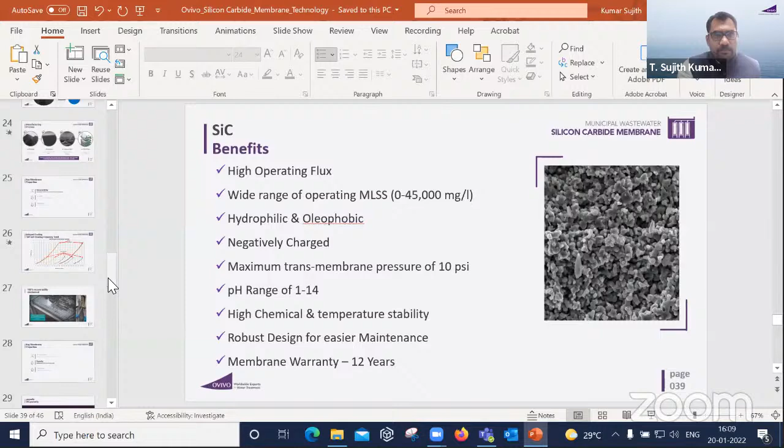I hope my screen is visible, Mr. Kailash, right? Yes, it is. Thank you. As I said, I'll be just taking you through for 15 to 20 minutes on Ovivo silicon carbide membrane technology, which has got limitless possibilities.

The flow of topics would be like: what are the wastewater challenges you have been facing currently, and what is the impact on environment, and what is the need of an MBR, and the MBR challenges. There have been various other membrane suppliers, like conventional membrane suppliers, and what are the challenges you have been facing, and how Ovivo contributes to those challenges, and what kind of value addition we bring to the table. That's how the whole topic will revolve today, right?

Now, what are the effluent challenges, right? When you talk about effluent challenges, you need to treat the water and reuse it.

That is one of the challenges. Consistent outlet quality has become a major challenge. In India, at least in municipal or industrial wastewater, plants are not running to design capacities. It's more on average 60-65% of the design water output parameter you get. You never get the design water quality or the hydraulic flow which is designed for.

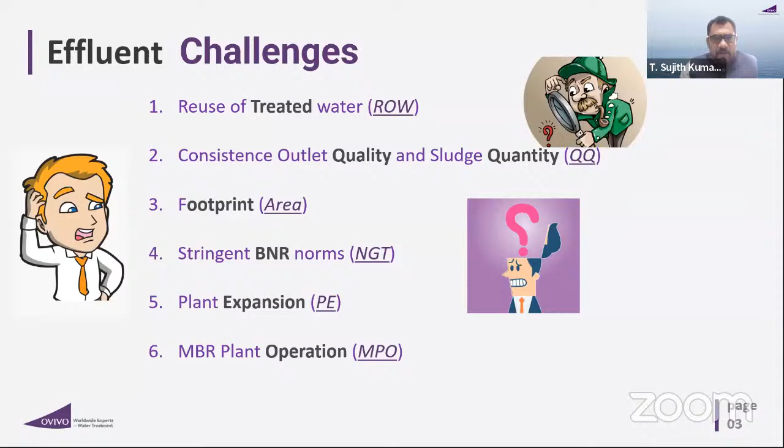Plant expansion has also been a challenge because of the growing population or growing demand. There has been an increase in challenges in augmentation of existing treatment facilities and plant operation, be it MBR plant or any other plant operation.

These are the first slide - what I talked about is the common challenges you face. I thought of preparing this next slide because we are more talking about industrial wastewater, so I thought of adding this.

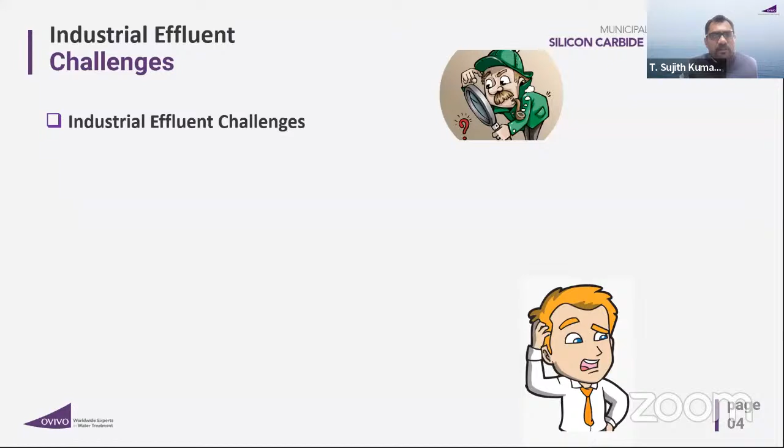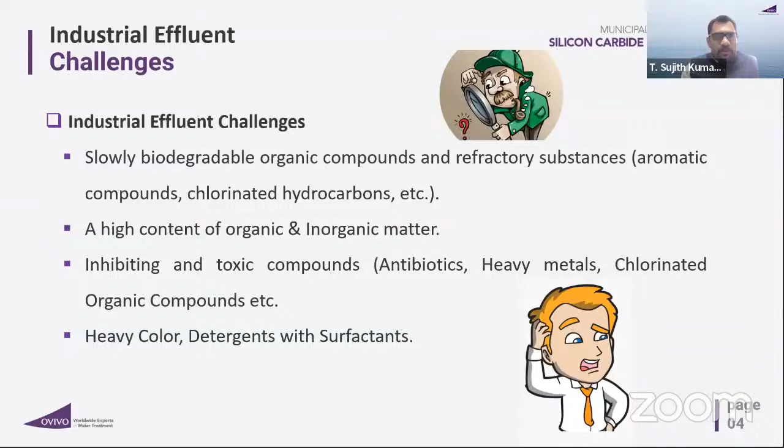On industrial effluent challenges, there's slowly biodegradable organic compound which has got a refractory substance - it is very difficult to degrade. That is one of the key challenges you face. The high content of organic and inorganic matter, inhibiting and toxic compounds - when you have these, definitely biology doesn't work. And heavy color, detergents with surfactants - these are the key challenges industrial effluent has, and of course the stringent regulations on discharge norms.

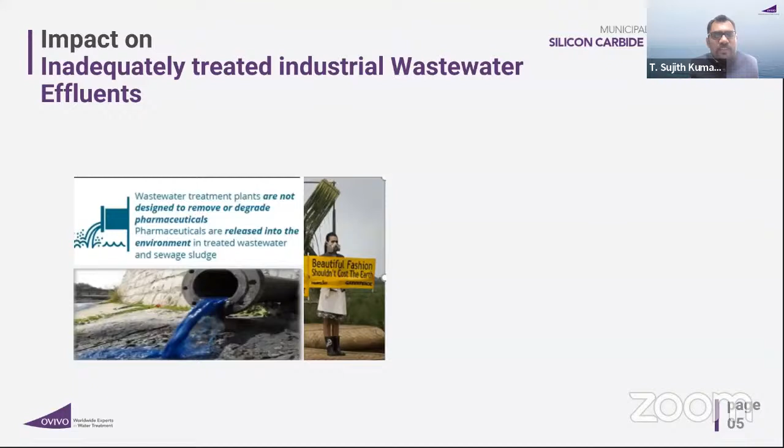Now what is the impact on the environment? If you don't treat the water properly, you are not doing your job - you need to have your social responsibility, treat the effluent to discharge norms so the receiving bodies are safe. If you don't treat it, dissolved oxygen depletion will happen to receiving bodies, you'll see physical change in their appearance. Eutrophication happens if nutrient removal is not done. Don't forget, this water is coming back to you - once you send it to receiving bodies, it comes back to you.

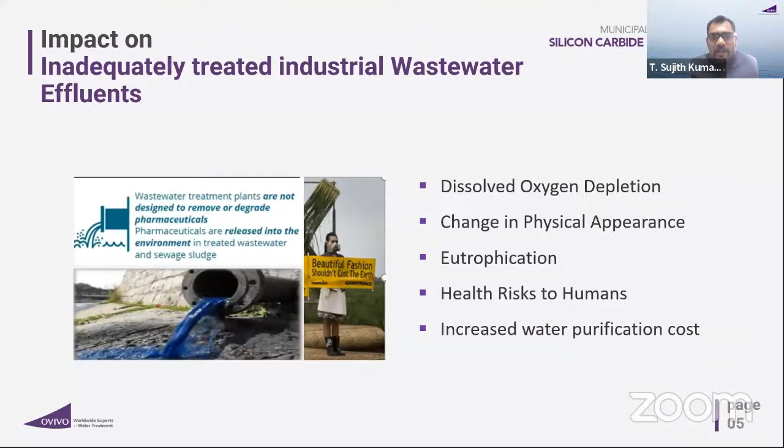So there is a health risk to humans and increased water purification cost. Also, you've been investing so much and if you don't operate the plant properly or select the right technology, you end up with increased water purification cost as well.

Now what is the need of the hour? You need to have sustainable wastewater management, choosing the right product and technology, which is key - recycle and reuse. This should be the mantra for all of India, at least for industrial clients. And optimize process design - you can't have a liberal design, you need to design your process optimized, as a workable solution.

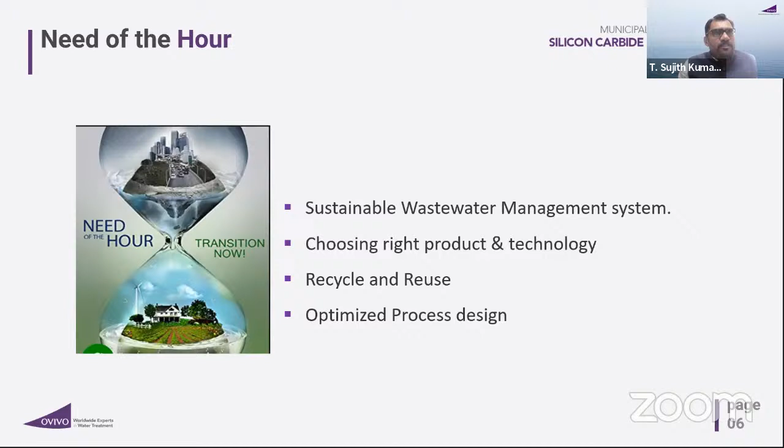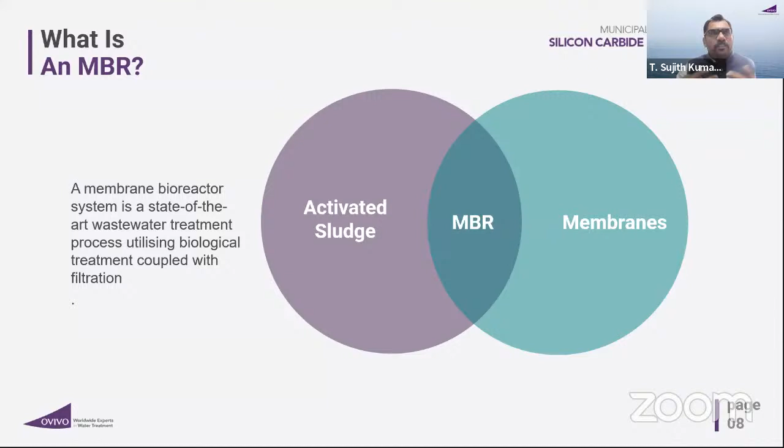Now we talked about the challenges and the need of the hour. Right now I'll get into an MBR system, which is today's topic - I'll talk about the MBR system and its challenges. What is an MBR? An MBR is a membrane bioreactor, it's part of the system, coupled with your activated sludge process and a filtration system. That is called MBR, membrane bioreactor - it is coupled with your activated sludge conventional treatment process itself.

Whatever BOD, biological oxygen demand, comes in, you give the oxygen, you cultivate the bacteria, and degrade it. In the same basin, you also do the nitrification process. Whatever ammonia comes in, you blow oxygen into the system, and all of it gets converted to nitrates. That water is going back to your anoxic basin.

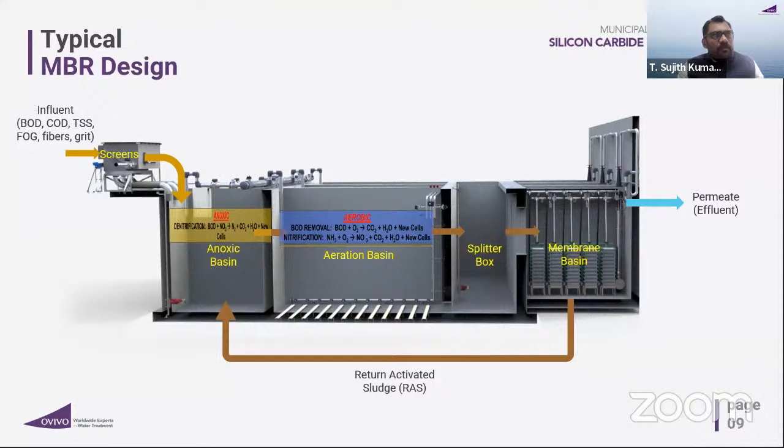When NH3 is converted to NO3, you need to convert that NO3 to N2. For that, you need an anoxic condition without the presence of oxygen. So you have this anoxic basin, typically 1.5 hours retention time, and you just convert that to nitrogen gas. It's a typical system. Any treatment plant, MBR, this will be the typical flow sheet you'd find.

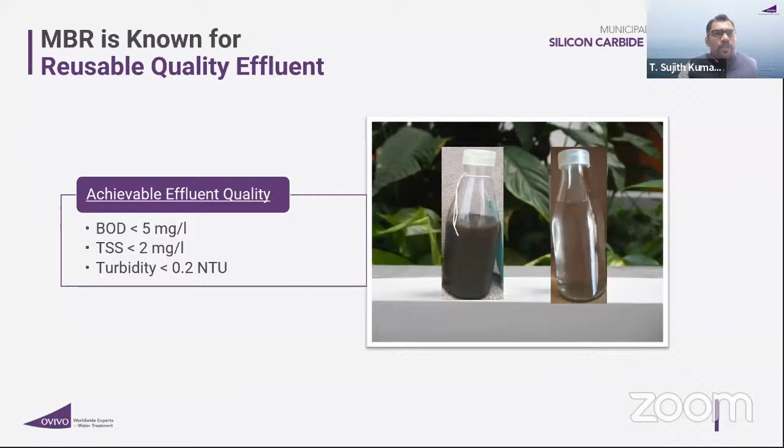Now, this is the basics which I talked about. People who have worked on MBR, if they think of MBR, they will feel that it will deliver the reusable quality - BOD5 less than 5, TSS less than 2, turbidity 0.2. Great, right? It is fantastic.

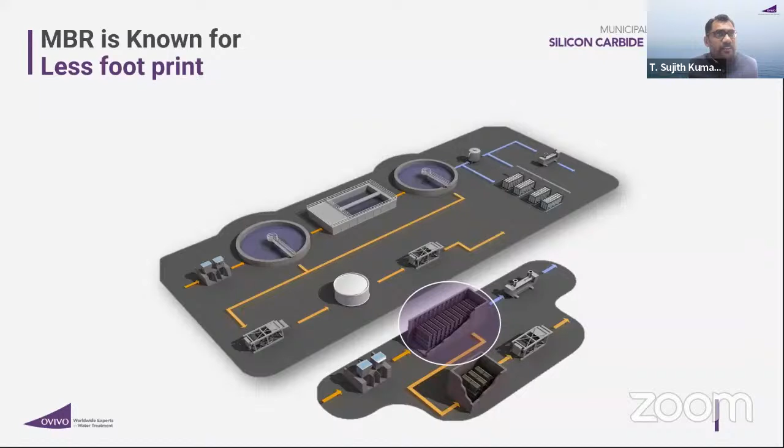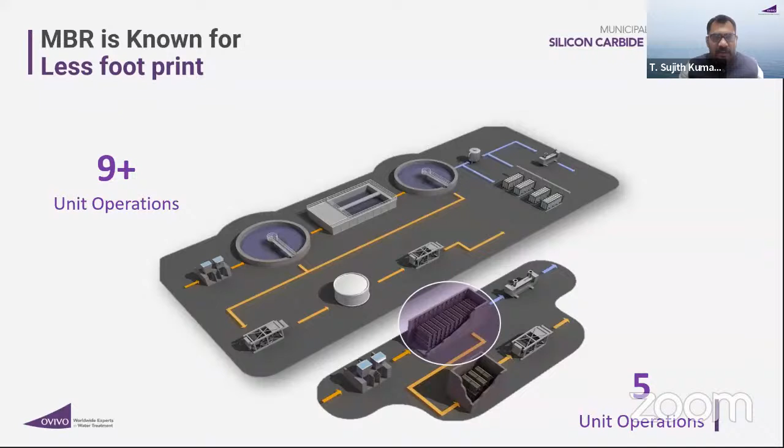And people also think MBR is known for less footprint. Definitely, if you compare with conventional treatment solutions, MBR will have very less footprint, almost I'd say 40% less, if you go with an MBR. That's what people always assume, and they also think about capacity augmentation, small footprint, retrofitting ASP to MBR, or for the recycle. So this is what comes to people's mind when they think of MBR - these are the things which would happen.

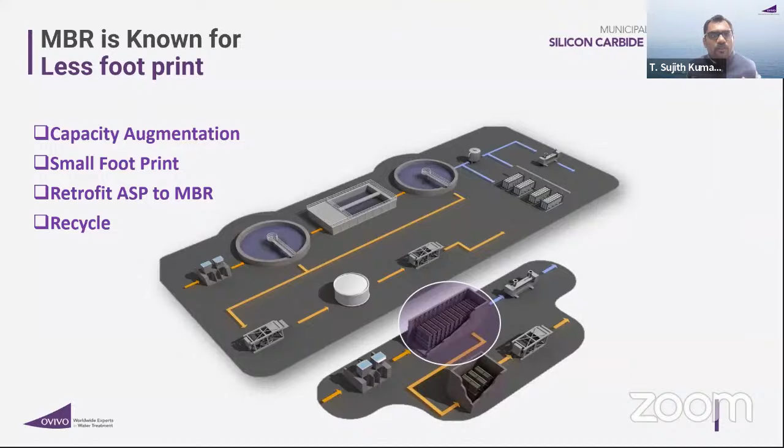But it could be challenging. Membranes could be challenging. Now what are those challenges? I'll address the challenges and how Ovivo adds value. I'll talk to that later.

Now, these are the people who have used conventional membranes, MBR, membrane bioreactors. They knew they can easily connect to these wordings - they will see there's a TMP limitation. Quickly, their TMP gets increased, transmembrane pressure gets increased. Premature fouling happens. People say that you need to do the cleaning once in, let's say, 3 months, but you end up cleaning once in 15 days or a month.

Durability and robustness - people say this has got a durable life of 7 years, but the actual practical scenarios could be something else. Premature replacement - usually the warranty for conventional MBR, people say it's 5 years, but they end up replacing very quickly. Premature replacement happens. Permeability is an issue, recoverability is an issue.

When I talk about permeability, if you design a system of, let's say, 1 MLD MBR system, within 3 months of operation, you will see there is a flux decline in polymeric membranes, which is proven. And Ovivo has been doing this business for more than 2 decades. I'll catch up on that later, what we do.

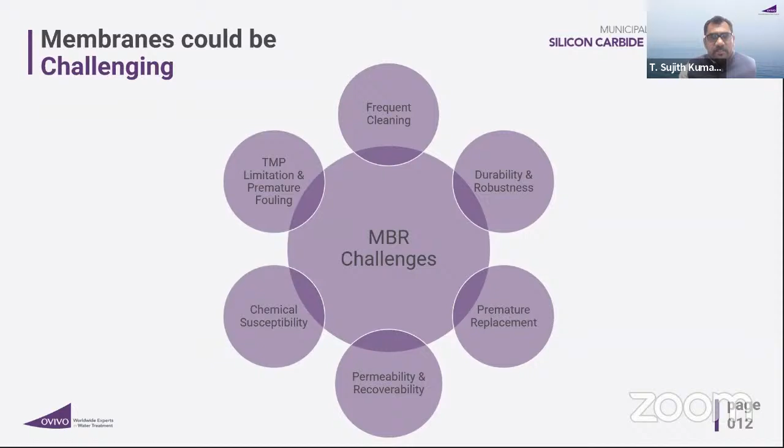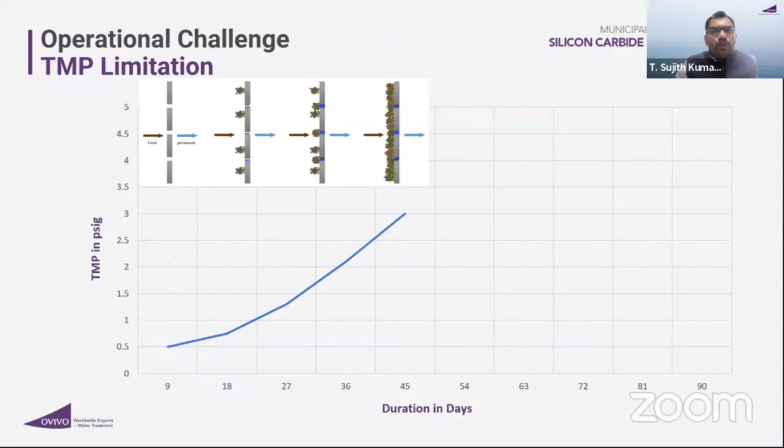Now, how it affects, I'll just brief on those. What are the operational challenges? Definitely, TMP is one of the operating limits. If you see the top slide, on the vertical side it's shown as membranes. When the membrane is clean, you get a clean flow. Eventually, when it reaches 45 days, you have to do the cleaning. When you keep doing this repeatedly and it reaches 3 psi, your membrane would get damaged.

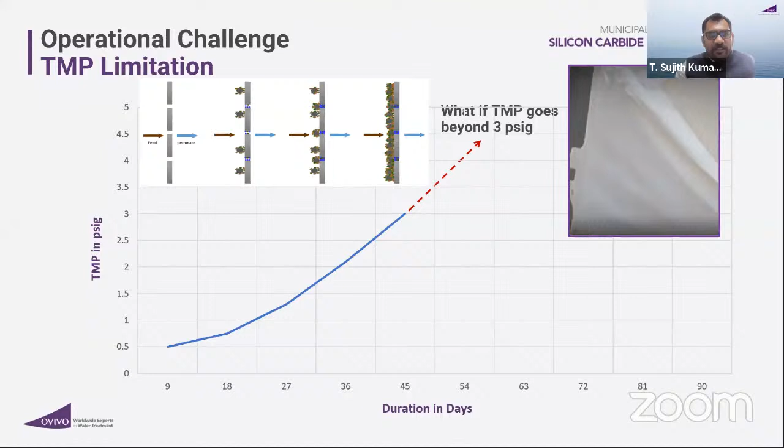When you intend to do the cleaning every 45 days and the frequency is very fast, the membranes tend to get damaged. Now, material dictates the TMP limits, because these are polymeric membranes - it cannot handle more pressure, and it is not resistant to chemicals. You will see that this would get damaged very soon.

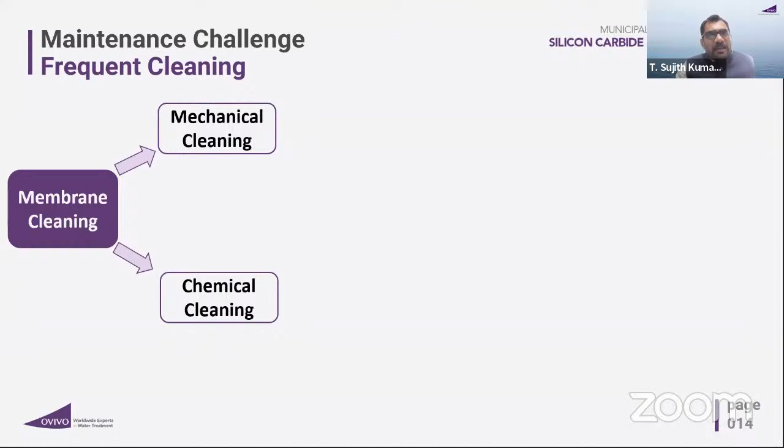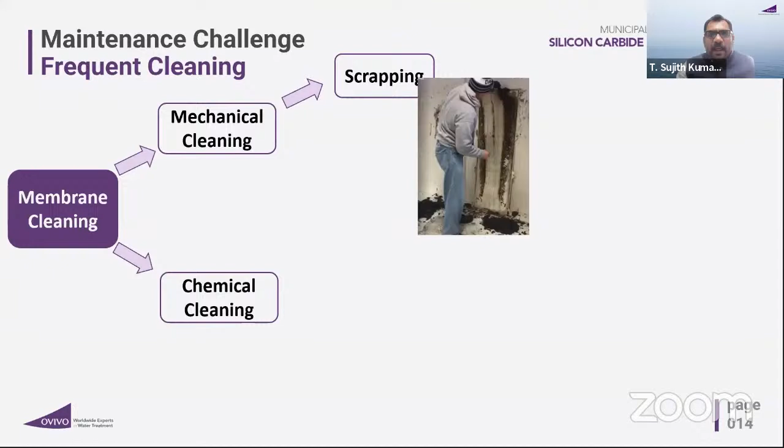Maintenance challenge, yes, you have this frequent cleaning issue. There are 2 types of cleaning: mechanical cleaning or chemical cleaning. In mechanical cleaning, you take out those membranes which have been sludge dewatered or highly fouled, and you scrap it out, which is very difficult. Or the other option is pressure wash, which is not possible for polymeric membrane because there is a pressure limit. You cannot go more than 3 psi, so there is a limit.

Or the other option is you go with acid cleaning and bleach cleaning. Again, you have a limitation of 3 to 11 pH and 5 lakh ppm of chlorine contact time. Frequent cleaning of any polymeric membrane will lead to membrane damage.

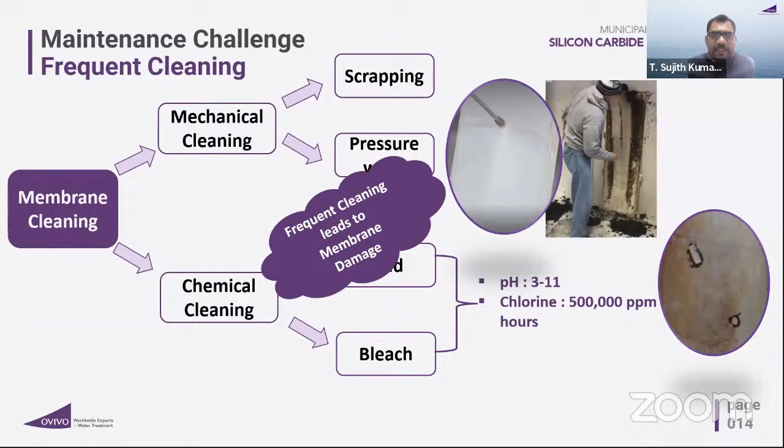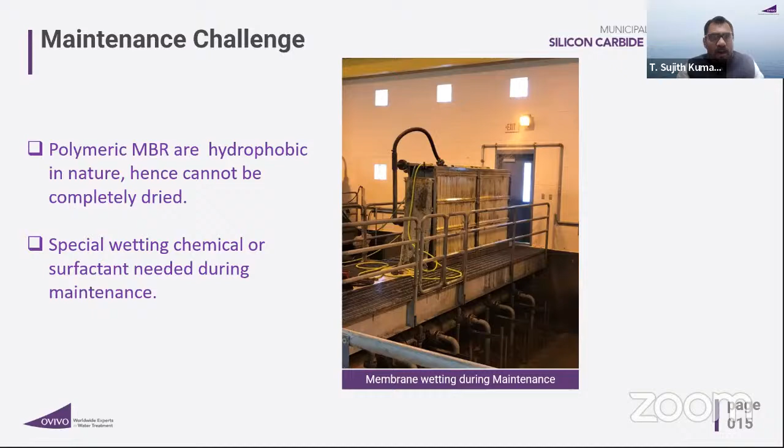The other maintenance challenge: in polymeric membranes, if you have to take out those membranes for some reason and do internal maintenance in the tank, you need to make sure these polymeric membranes are continuously kept in a wet condition, because these membranes are hydrophobic. If you don't keep these membranes wet, the pores would collapse, and eventually you will not get the required desired output parameters. The other option is you keep wetting with water or add some chemical, but again it adds to the cost.

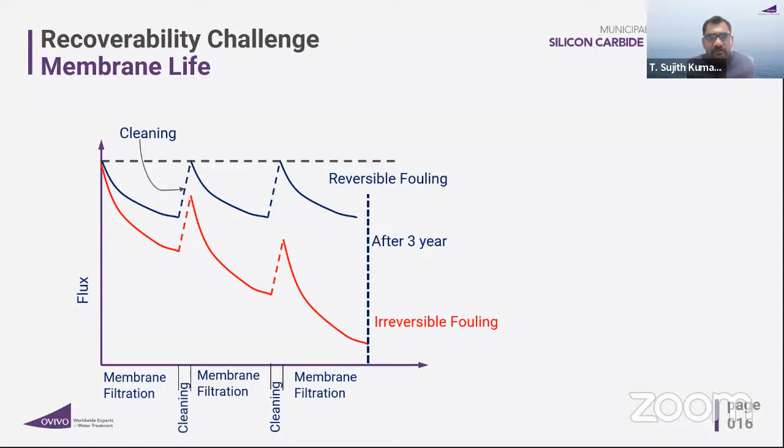The other recoverability challenge is the membrane life. When the membrane is new, any membrane is bound to foul and bound to scale. You operate the system, the membrane gets fouled, you clean it, it comes back to the original condition, and you keep using it. But after some time, there is irreversible fouling happening. Once the membrane is cleaned, you'll see a flux decline, not getting back to the original position. Slowly, eventually after 3 or 4 years, those membranes become irreversible, meaning you can't clean and recover them. That is the point you decide to replace the membranes.

Now, what are the reasons for flux decline? Sludge dewatering is one of the reasons, along with organic fouling and inorganic scaling. This anyway has to happen because you are dealing with wastewater, so it is bound to happen.

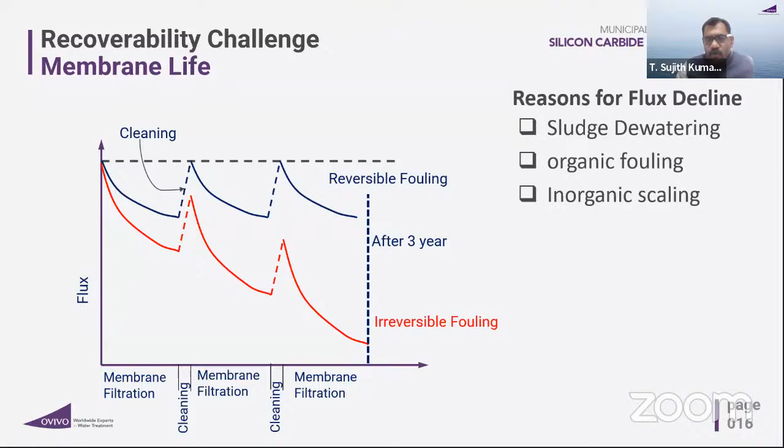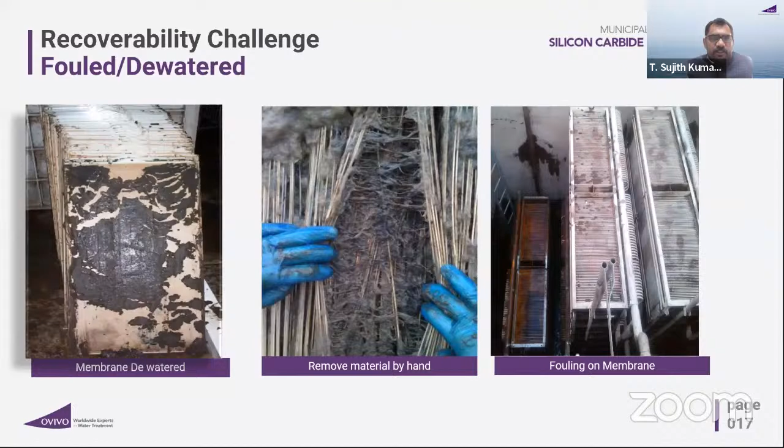These are some pictures of fouled and dewatered membranes. We've found there are flat plate, flat sheet membranes available in the market. On the left side, you can see the flat sheet membranes which got dewatered, and the middle picture shows the hollow fiber membranes. It's very tricky once hollow fiber membranes get dewatered, even very tricky to do physical cleaning, because it would look like a bunch of straw - you cannot pull the sludge from in between the bunch of straw. And the other fouling you can see is iron fouling, which usually happens on the membranes.

No membrane is immune to fouling, no membrane is immune to scaling. The key lies with the material and how easily and quickly the clogging can be removed - meaning recovery, it has to be recovered back. Membranes are bound to foul, bound to scale. The challenge lies in how fast you can recover those membranes and bring them back to the original position.

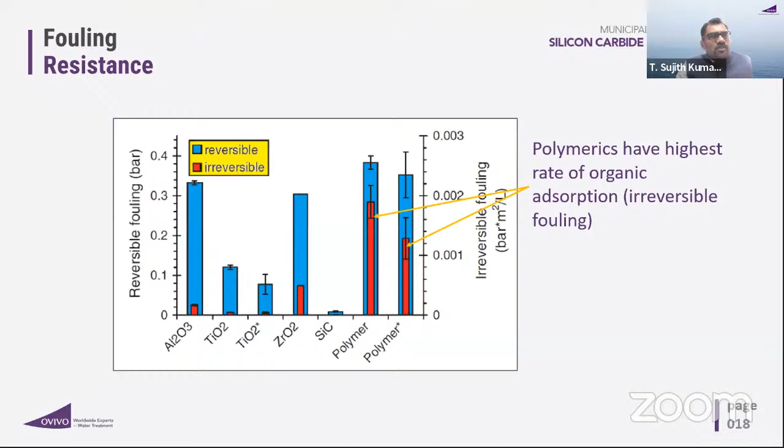On the fouling resistance, this data is publicly available. If you see, polymeric membranes have got the highest rate of organic adsorption, meaning irreversible fouling. Among the many types of membranes available, polymeric membrane has got the highest organic adsorption rate.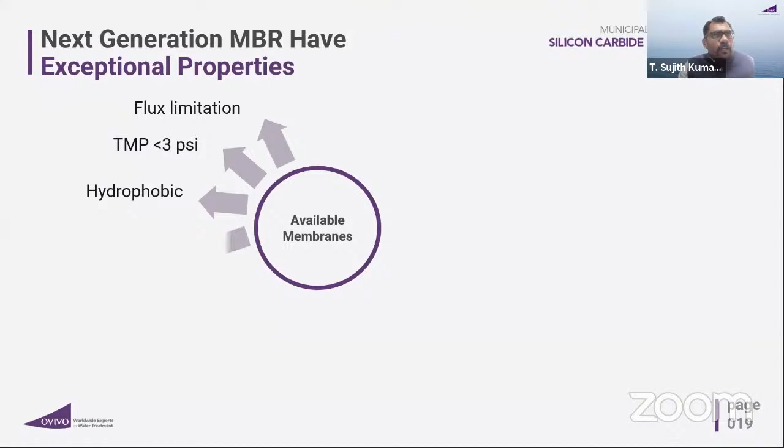Now, there are new generation membranes available with exceptional properties. Let's see what they are. What we learned is conventional polymeric membranes have a flux limitation and a transmembrane pressure limitation - you can't go below 3 psi. Membranes are hydrophobic, so there are potential chances of membrane pores collapsing during maintenance activities. Fouling propensity is very high, frequent cleaning happens once in 45 days, and it's sensitive to chemicals because you can't go beyond 3 to 11 pH. The warranty you get is 2 to 5 years.

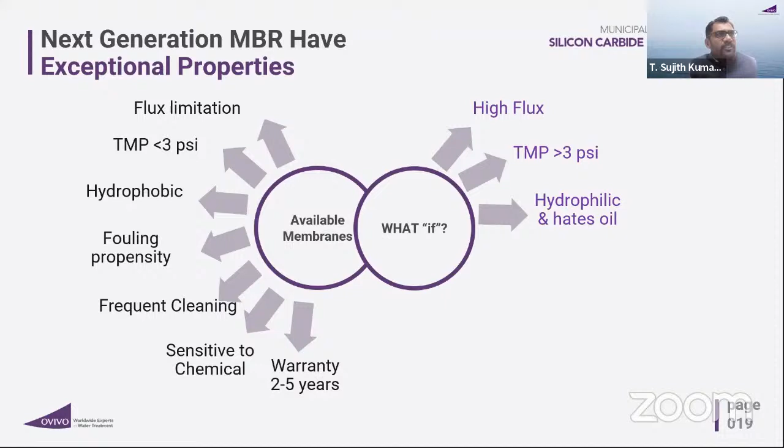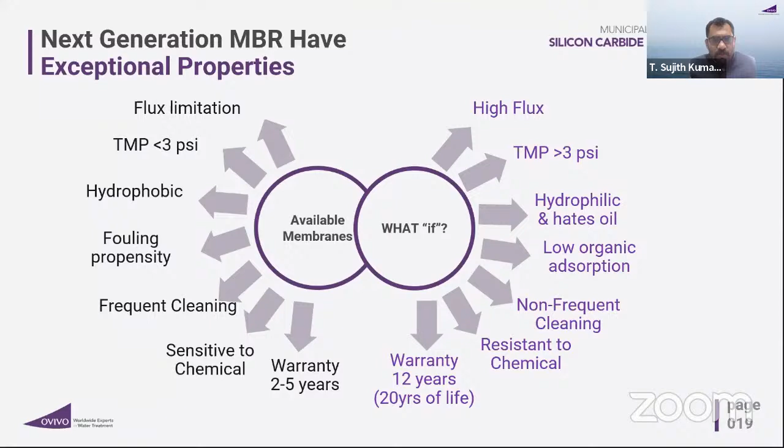Now, what if there is a membrane available which can take very high flux, 3 times that of polymeric, TMP up to 10 psi, a membrane which is naturally hydrophilic and oleophobic, with the lowest organic adsorption rate, non-frequent cleaning, resistant to chemicals. Beyond all this, the life of the membrane is 20 years, and the supplier gives you a warranty for 12 years. Don't you prefer that?

I'll just brief you on our experience. We have been in this field for more than two decades now. We are totally submerged into the MBR system. We used to promote, Ovivo used to promote polymeric membranes earlier. Slowly we moved out of polymeric because we found the future is something else, which I'll share.

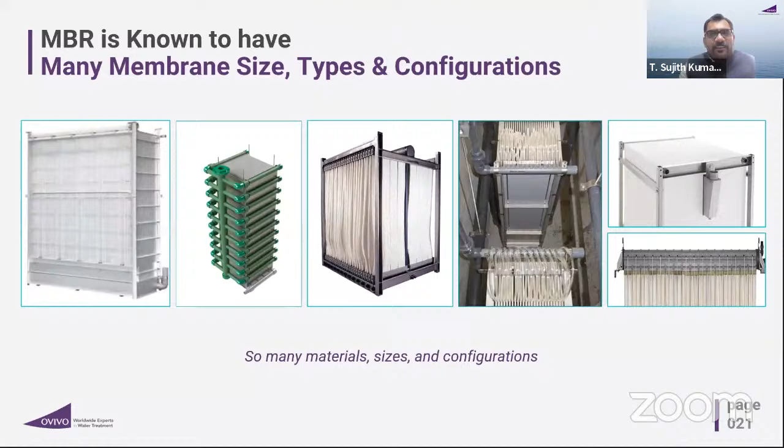Usually customers get confused, because in the market you'll find many types of membranes available. You have flat sheet, polymeric, PVD. In polymeric itself you'll have PVDF, you'll have PES, you'll have PE membranes, many types of membrane. So customers usually get confused which one to choose.

So I'll just run this video for a minute. I'm sure that you can hear the sound also.

I'm sure you are able to watch this video seamlessly without any technical glitch. We have a new generation membrane which has got limitless possibilities. It will overcome the issues faced with polymeric. Let's see.

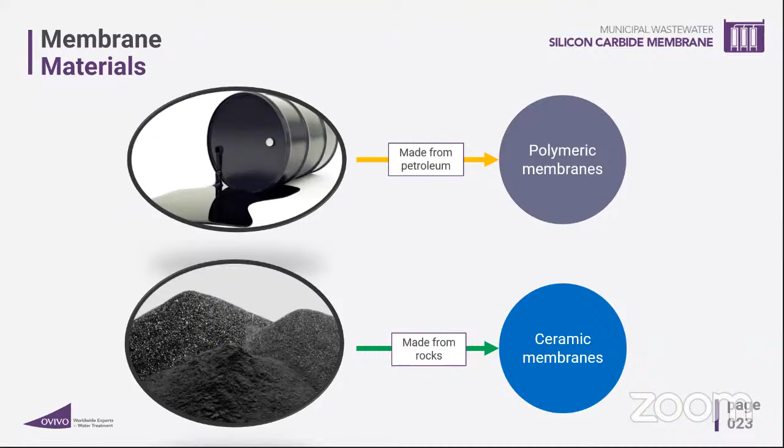Hello. Yeah, Sujith, your voice is frozen. Sujith, I believe we are facing some technical difficulty at your end. Can you hear us? Can somebody from the Smart Water team do a quick call to Sujith to check? Hello, yeah Sujith, we missed you when you... Yeah, I'm sorry for that. Yes, I'm sorry for that.

Well, whatever precaution you take, you'll end up with some technical glitch. I'm sorry for that, maybe I missed this slide. You were in the slide immediately after the video about the materials for membranes. Yes, Sujith sir, you will have to reshare the slide once again. Okay, I'll do that. Sujith, you still have 2-3 minutes. Yes, I'll wrap it up.

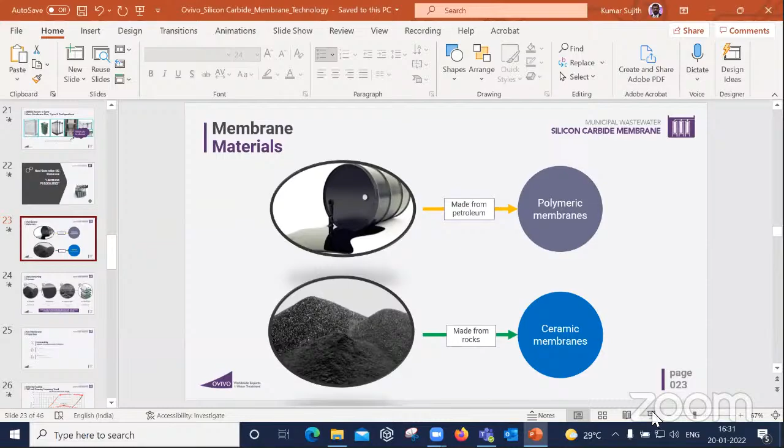We can see the slide. You can just play it and make it full screen. Good to go, right? Okay, sorry, I'll talk about membrane materials.

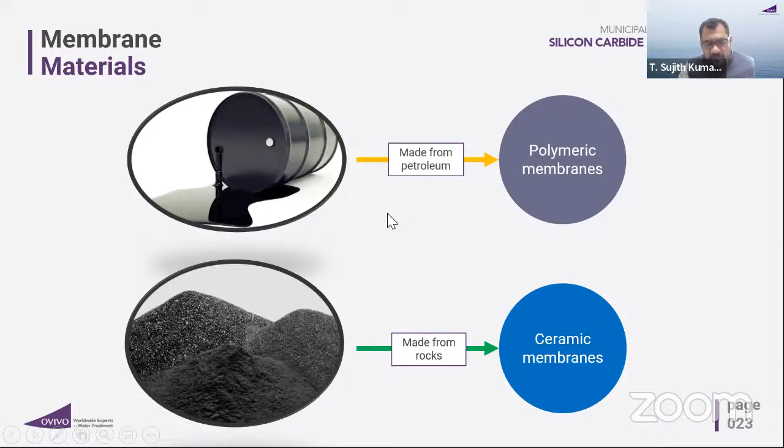Polymeric membranes are made out of petroleum product, which is not environmentally friendly, whereas the advanced new generation membrane we offer is made out of rocks. It's a simple inert material. If at all something goes wrong after 20 years, you have to dispose of this membrane. It's very easy to dispose because you can just crush these membranes and bury them. It's as simple as that. Since these are all made out of inert material, it's just a manufacturing process.

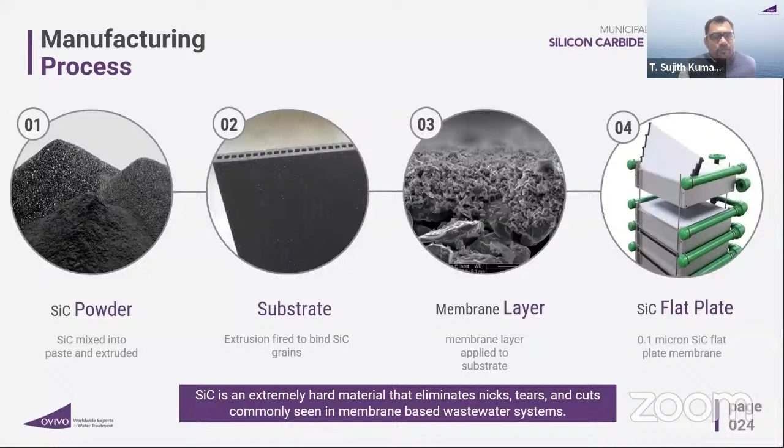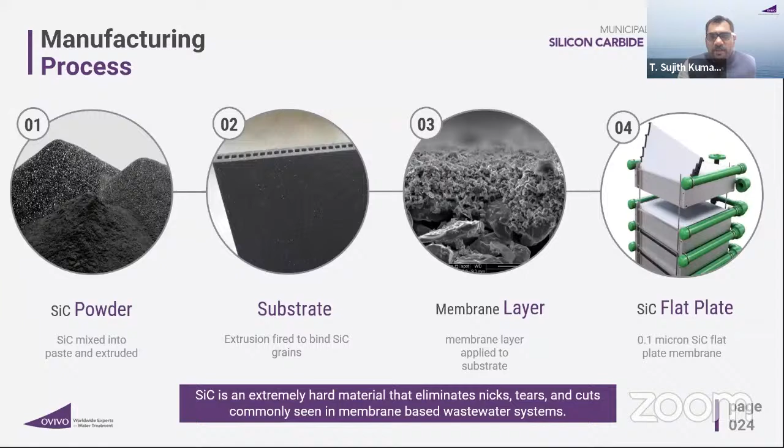We have this SiC silicon carbide powder, which would be extruded to the paste, and we expose it to the sintering process at 2200 degrees of temperature. We apply it on the membrane layer, and the membrane module is formed. It's silicon carbide, Ovivo silicon carbide membrane modules.

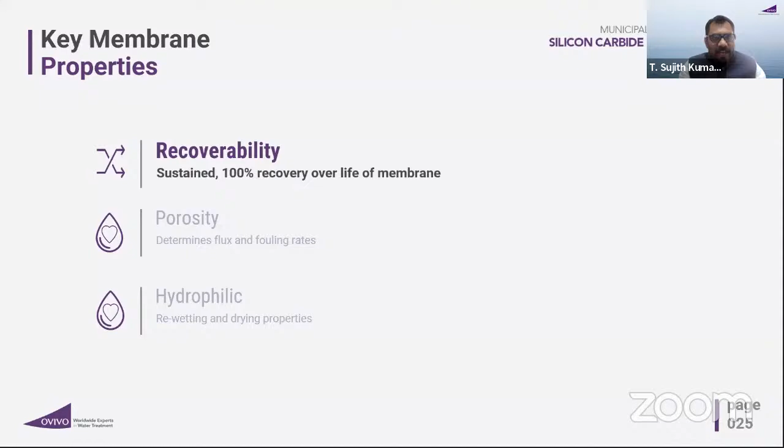The key advantage, key property of this membrane which polymeric cannot compensate for, is the 100% recoverability. As I said, the membranes are bound to foul, bound to scale, but the recoverability is the challenge. You can recover these membranes.

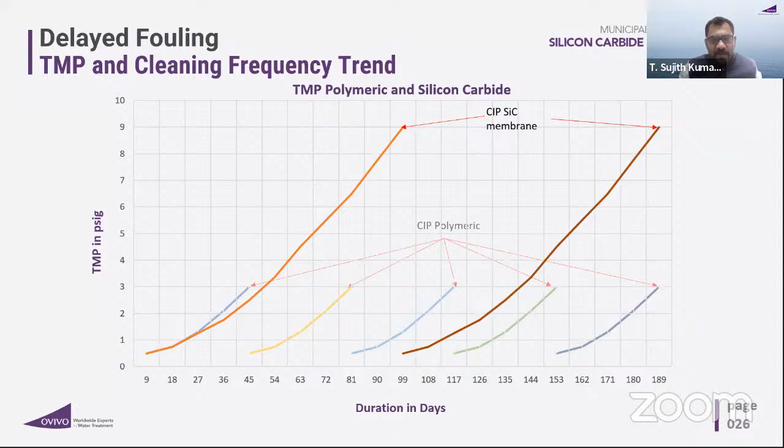I'll just brief quickly, I know I'm running short of time. As I demonstrated, polymeric membrane needs cleaning every 45 days. If you go with any silicon carbide membrane, the cleaning would take around 90 days, that is 3 months. That means you are delaying the cleaning. When you delay the cleaning, you are saving on chemical, you are saving on flux, everything.

But since these membranes are very robust, made out of inert material, you can also do a pressure wash. You take out those membranes, if it is dewatered completely, just do the pressure wash with 2 to 3 kg pressure, absolutely no issue, whereas that is not possible with polymeric membranes. And the porosity - SiC silicon carbide membrane has got the highest porosity among available membranes, compared to PES or CPE membranes. That is the reason we are able to push through more flux, 3 times the flux compared to polymeric.

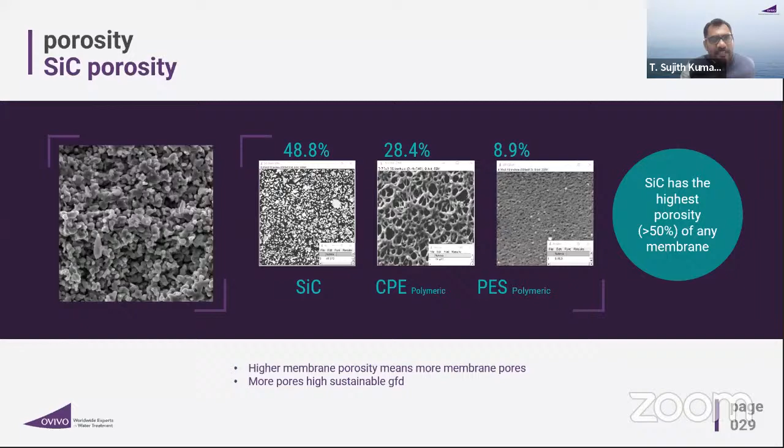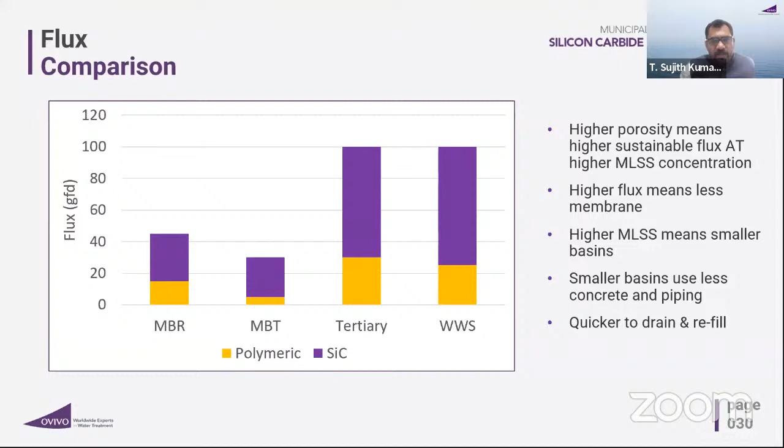When you are able to take more flow within the given area, your footprint also would come down. This is some of the comparison on the flux. We apply this membrane to many applications, be it clear water treatment, membrane bioreactor, thickening application - MBT is membrane biothickening, tertiary wastewater or wet weather system. You can take very high flux compared to any polymeric membranes.

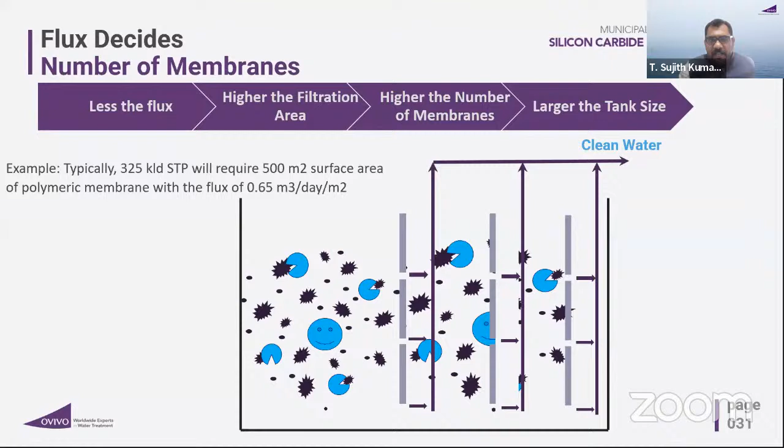It's a typical example what we have shown for a 325 KLD STP. You need a polymeric membrane area of 500 meters square with the flux of 0.65 meter cube per day per meter square. This is the typical polymeric design. Whereas if you go with SiC membranes, you need just 30%, 40% of it, 171 meter square area, that's it. Your footprint also would be very less because we take the flux 3 times. In polymeric, you can take only 0.65 meter cube per day per meter square. Here we can go up to 1.9 meter cube per day per meter square.

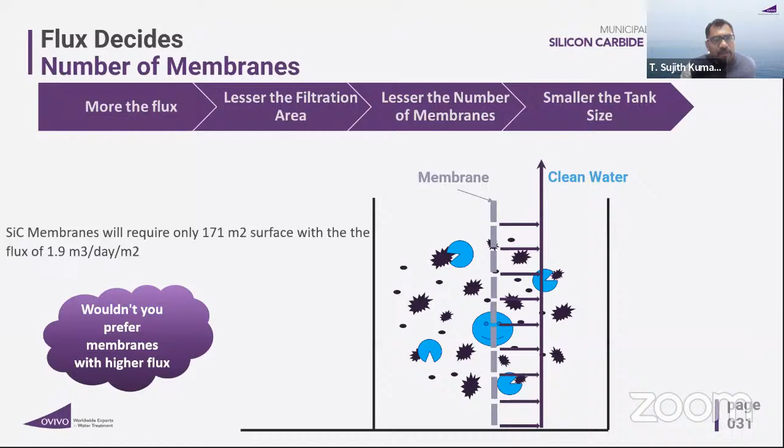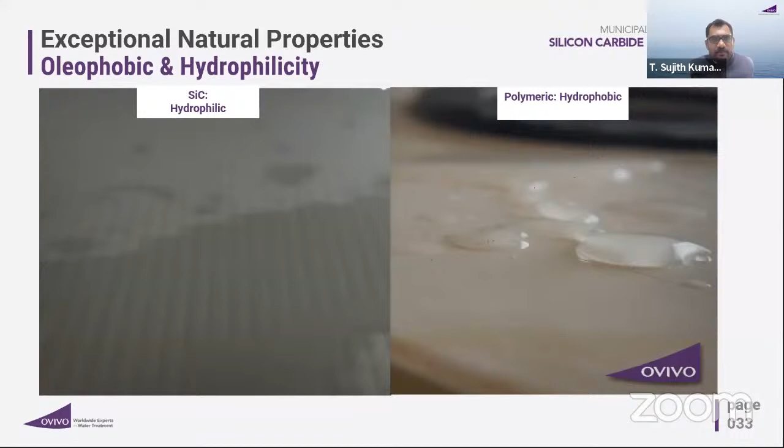And as I said, it's also oleophobic. It has also got negatively charged - these membranes are also negatively charged. Particles around the membrane, be it in submerged condition, you'll see the particles are negatively charged. The fouling propensity will be very less because the particle around the membrane is also negatively charged, and membrane is also negatively charged. It tends to repel.

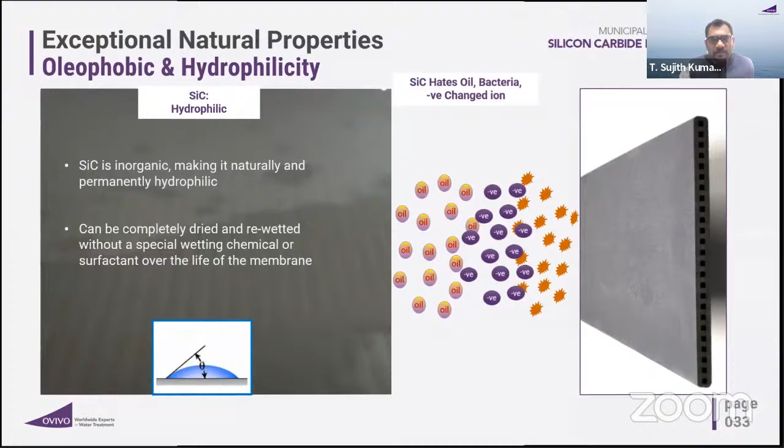And it has got an exceptional resistance to temperature and chemical. Temperature, it can handle up to 80 degree temperature. It can handle up to pH 1 to 14. And the chlorine ppm mass is 50 lakhs - we are talking 10 times more than the polymeric. Whereas in polymeric, you can't go beyond 5 lakhs. Here we are talking about 50 lakh ppm mass.

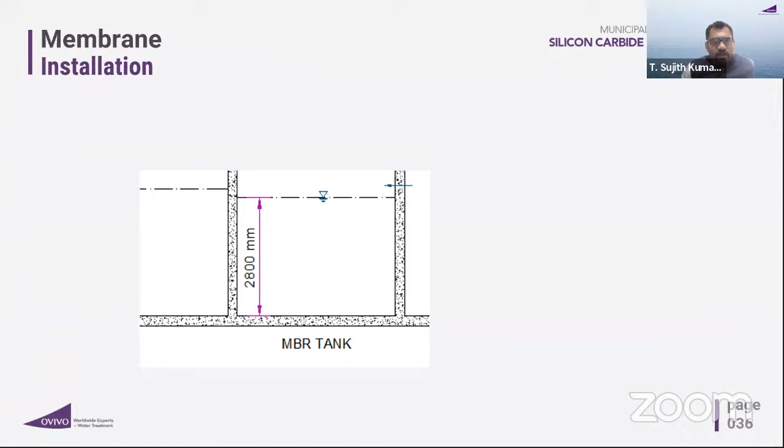Yeah, this we talked about it. And it's easy to install also. It comes with 160 module, one module will have 6 meter square area. You can just put one by one easily.

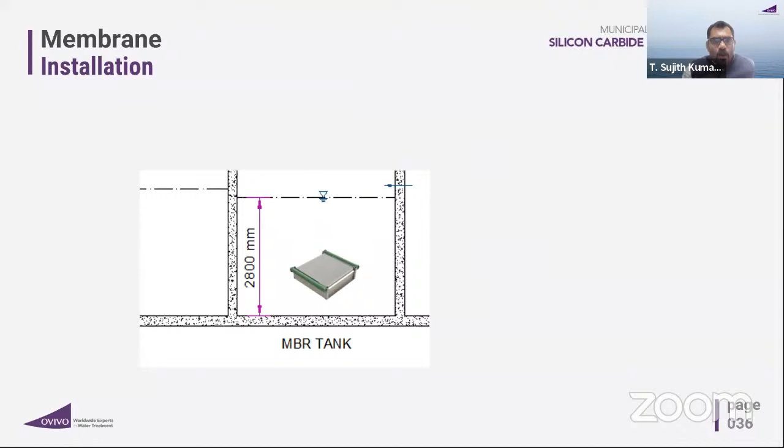This will be tricky where if you want to install the membrane system in the basement, where you have the clear height will be very less, in that area you can have this kind of arrangement.

And definitely it gives you the superior treatment - BOD less than 2, TSS less than 2, ammonium nitrogen 1, the discharge limit, even the SDI less than 3. You can straight away pass this water to the RO system, no need of any further treatment.

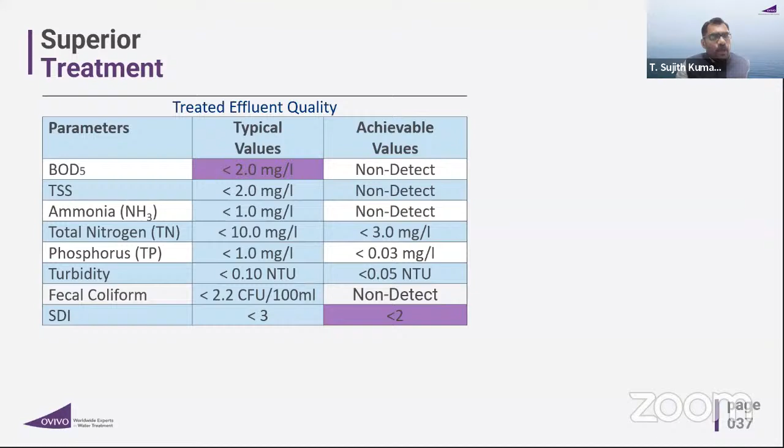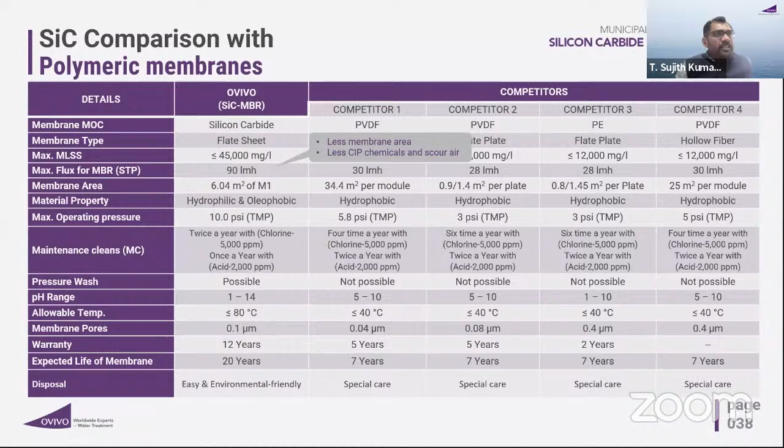It can handle up to 45,000 mg/L because it has been used for various applications, including membrane thickening. 90 LMH is the flux, whereas compared to 30 LMH what polymeric membranes use. This membrane is hydrophilic membrane and oleophobic membrane. Thus, it has got a low propensity of fouling of the membrane, and it also repels the oil because it is oleophobic.

This is a brief comparison what we made it for the polymeric membranes, be it PVDF or PE membranes. And we also offer 12 years of warranty with 20 years of life.

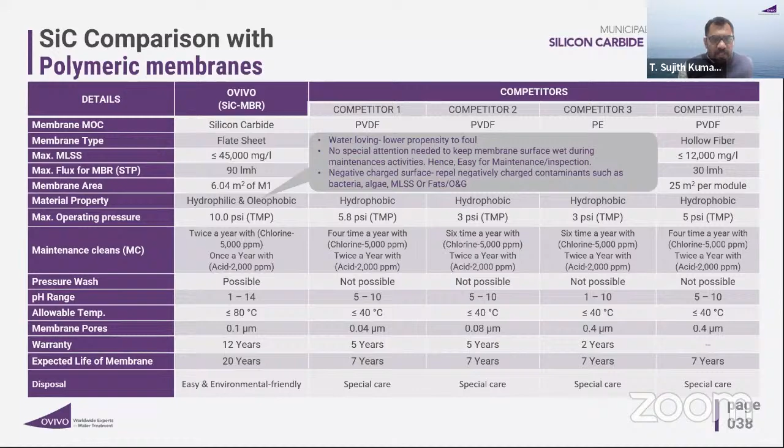I'll just quickly shift. Yeah, it's the same thing. These are our esteemed customers where we have executed our MBR systems.

I'll just brief about Ovivo. I haven't talked about Ovivo, what Ovivo is. It's a Canadian company, deals with water and wastewater treatment. We have an expertise of 150 plus years. We have grown by acquiring many companies.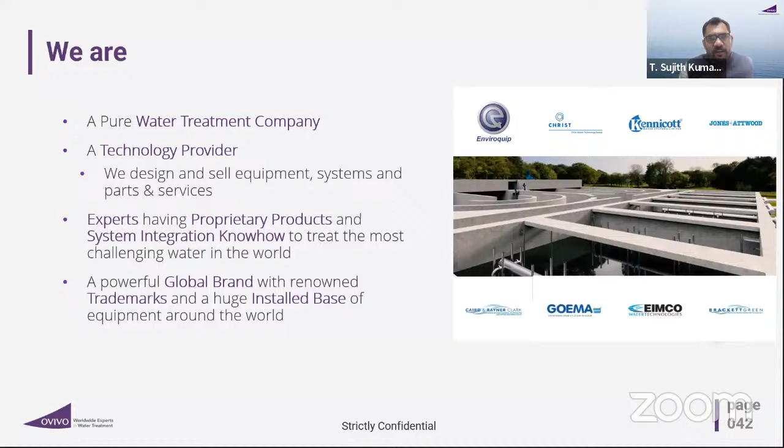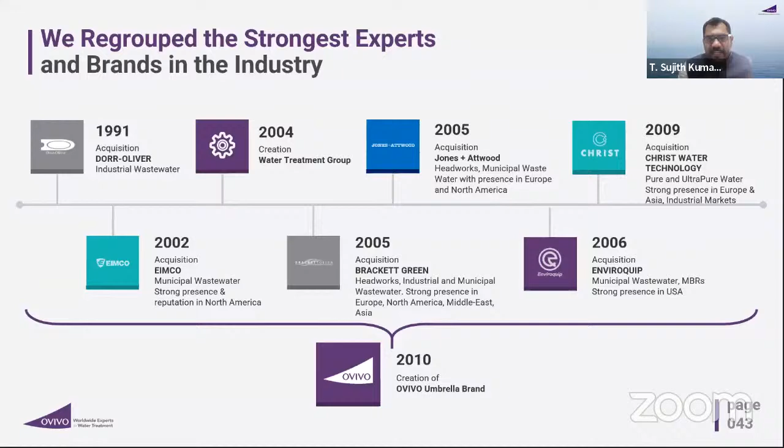This is just a history of how Ovivo was formed. I'll just skip this. It started from 1991, acquiring a company called Dorr-Oliver in the US, and thereafter they didn't look back.

We have built an integral platform in India. India is considered the knowledge and service center, and we are also a center of excellence for biological process, sitting in the India office. We have been supporting our global offices, be it the North American market or European market. We have 55 plus engineers in India who support domestic as well as global projects.

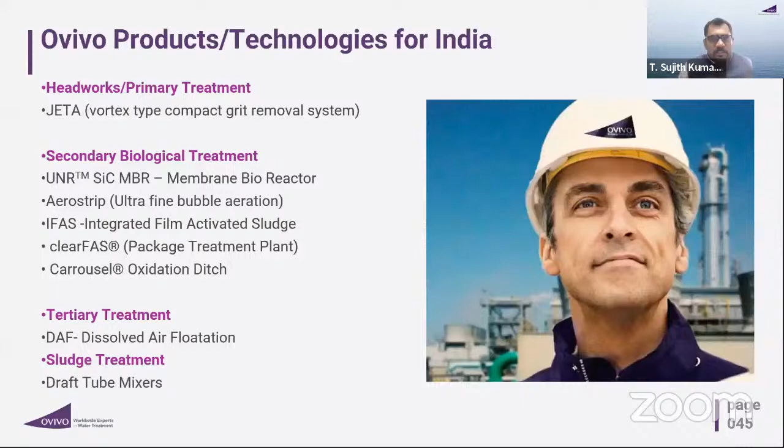These are our products which we have been selling in the Indian market. I'll be happy to connect online or offline to discuss more on these products and technology. Essentially, we are very active in the municipal and industrial market.

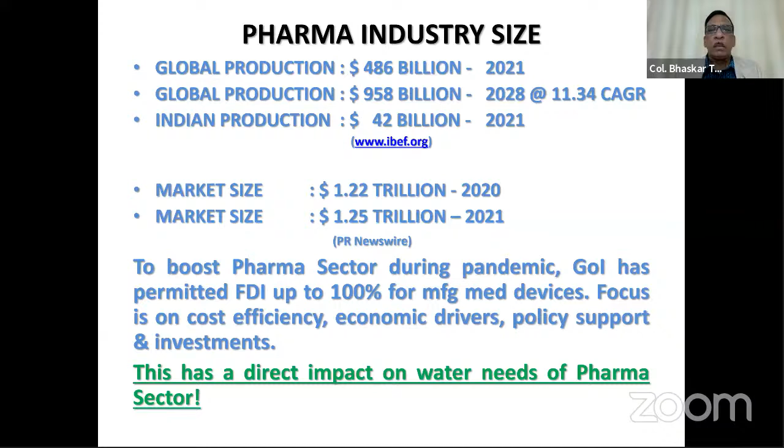Now, all this is going to have a direct impact on the water required by the pharmaceutical sector. There are several guidelines and directives on the water quality required by the pharmaceutical sector. Water for pharmaceuticals use, WPU, is a term which is very commonly used across the industry.

A working document in May 2020 was issued by the World Health Organization. It was titled Good Manufacturing Practices, GMP, Water for Pharmaceutical Use. It basically focused on the production of pharma grade water for injection, also called WFI, by means other than distillation. Earlier, distillation was considered the only process to produce water fit for injection purposes. Now, with the advent of several other physico-chemical processes, we have multiple options to reach the same level of purity.

The important thing about pharmaceutical water is the microbiological and chemical quality of water, which has to be controlled through the several stages of production, storage, and distribution. There are two major pharmacopoeial requirements which provide guidance for production of WFI.

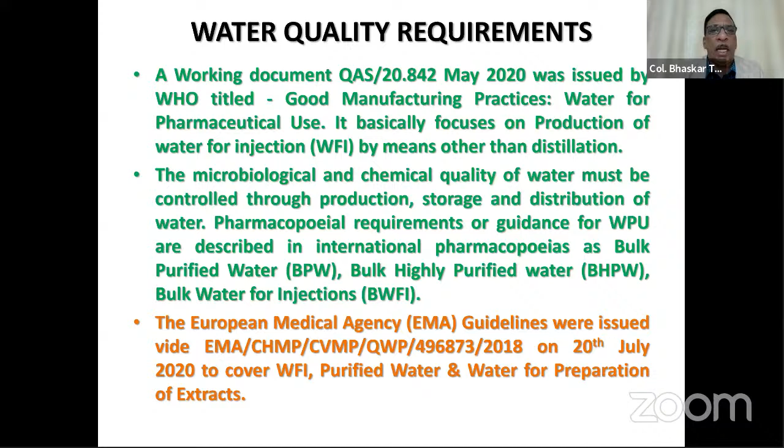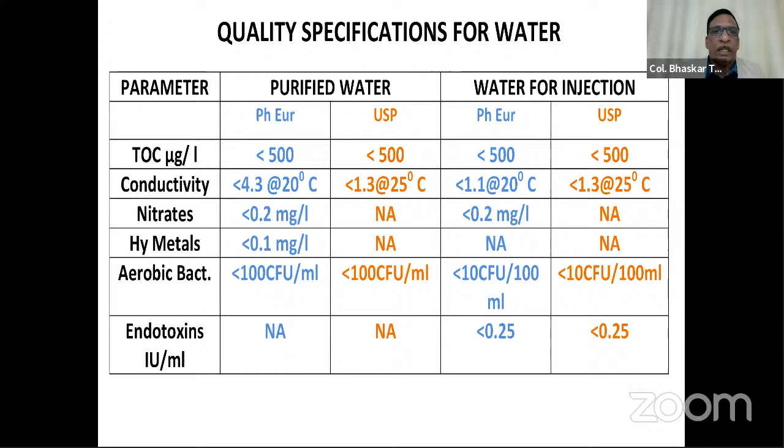Now, first, I will talk about the water requirement of the semiconductors industry or the semiconductors sector. Here again, if we go by the global business in semiconductors, it rose from $426 billion to $452 billion in the last year, and is expected to grow to $803 billion by 2028.

Everything that we do, including this presentation which you are watching, and the electricity which comes to your home, these several gadgets which we use, the automobiles, the cell phones, you name it, semiconductors are there in every one of them, they form a component of all the gadgets, every machine. In addition, they are also vital for the growth of artificial intelligence, Internet of Things, and machine learning. Consumer goods, including your refrigerators, washing machines, anything that you have that you use in your homes, they use these semiconductors.

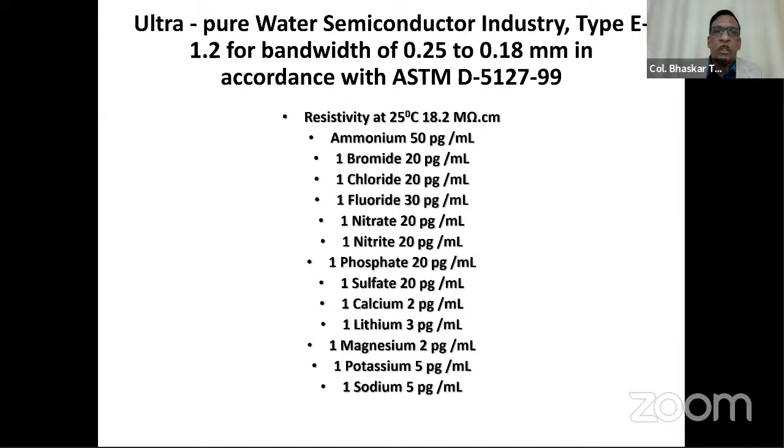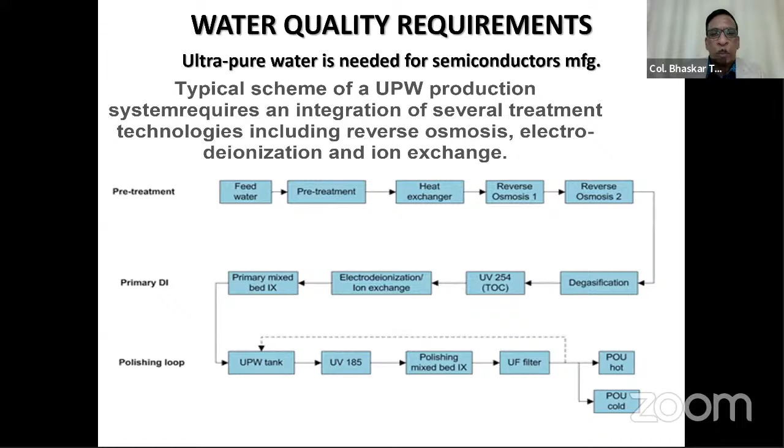There are several quality management issues when we talk about ultra pure water, because when you see the level of purity that is required and the concentration of several impurities, and you also see the entire process of purification, you will understand that through the process of purification, followed by its transport through the several pipes and pipe fittings and its storage, there are issues related to its quality.

And its quality has to remain steadfast through the entire process. So the quality management issues start with production, process selection, and the output. Prevention of changes in the physicochemical attributes is most important.

And then when it is flowing into the tubes, during distribution, during the production process, the flow has to be continuous. There have to be online quality checks. The wastewater has to be isolated. It cannot be permitted to mix with the ultra pure water. The wastewater has to be collected, effectively removed from the process sites and treated.

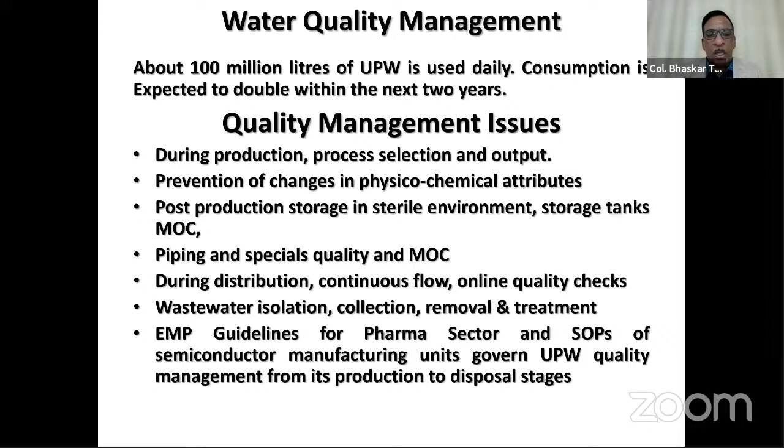And the EMP, as in the European Management Practices Guidelines for the pharma sector, and the SOPs for semiconductor manufacturing units, govern the ultra pure water quality management from its production to disposal stages. These have been elaborated in the several pharmacopoeias as well as these guidelines.